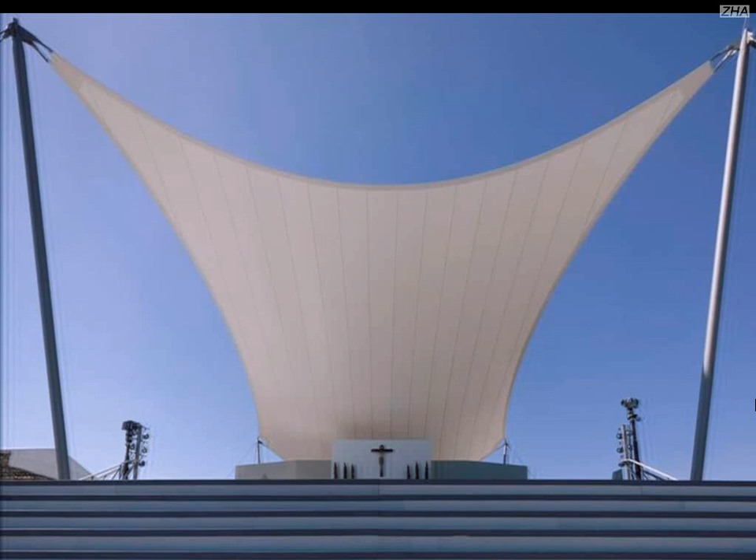So talking with Materialleichtbau, this is what I did, for example, when I act as an architect. This was a call from the Vatican whether I would be willing to design a canopy for the Pope. So I was a little bit shocked because I went out of the Catholic Church already 20 years ago, but they obviously didn't realize that, so I said yes. And I thought I would design a canopy. We finally designed the entire altar, the chair, the cross, whatever you see there.

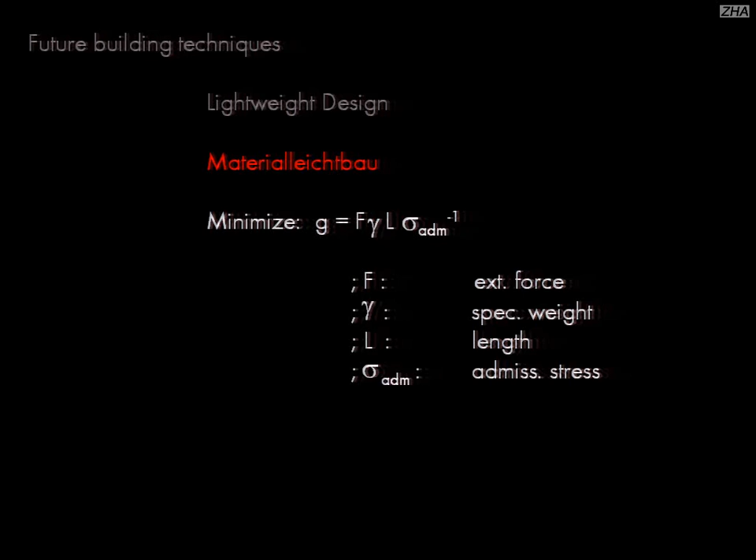And this is Materialleichtbau, for example. This is a material we use, the dead weight of which is in the range of 900 grams per square meter. And now the only formula I will show: if we do Materialleichtbau and ask how much weight does it take to transfer a force from here to here over a distance of 1 meter, this means becoming light. Then we have to fulfill this formula, which is nothing else than minimize the weight g, which is equivalent to the density, the specific weight, divided by an ability, for example, an ultimate stress the material can offer.

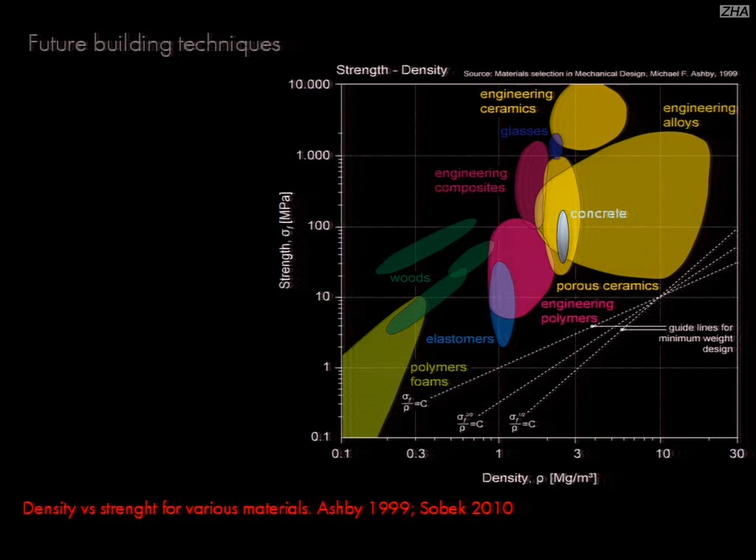And if we now look at famous diagrams like these where you have strength versus density, you find the different material groups, and then you pick 1 or 2 in order to compare them and to find out what material I would have to choose if I have this force in the range of 1 to be transferred over a distance of 1 length unit. And we get a result: for example, steel, you need 30, whatever that is, and concrete 90. So this is what we already knew. Obviously, if we do lightweight structure, we choose steel instead of concrete. And aluminum would be even better, at least if we talk about strength.

And if we would take titanium, it would be even better. In our office, we designed the largest titanium structure ever done with Hans Hollein, 27 kilometers of titanium pipes. But remember this: if we want to become engineers responsible for green issues, architects thinking about green technologies, and we would like to reduce the consumption of resources, we look at this.

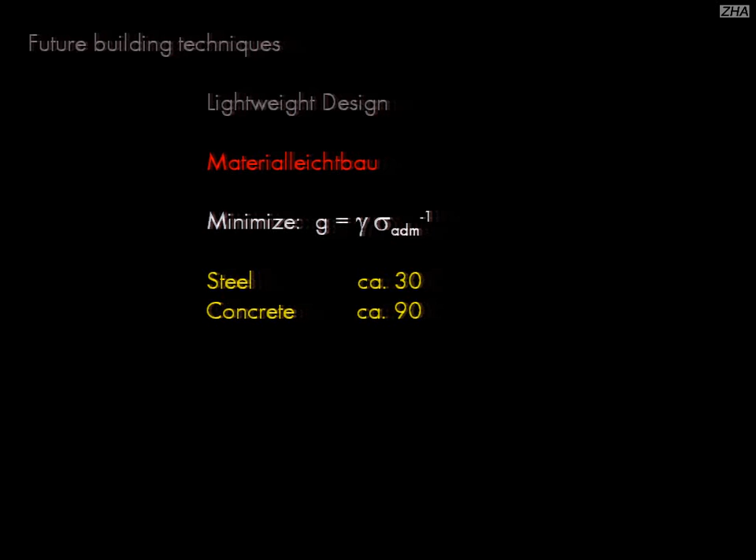But there's another question. In order to produce that material, you need energy. So we call that embodied energy, the energy which is embodied in this piece of glass, which is needed to produce it. And if we now say we don't talk about minimum weight, we talk about minimum embodied energy, the formula is slightly different, but it finally condenses to minimize the embodied energy, which is nothing else than the embodied energy per unit divided by the ability of the material to do something, for example, to carry a stress.

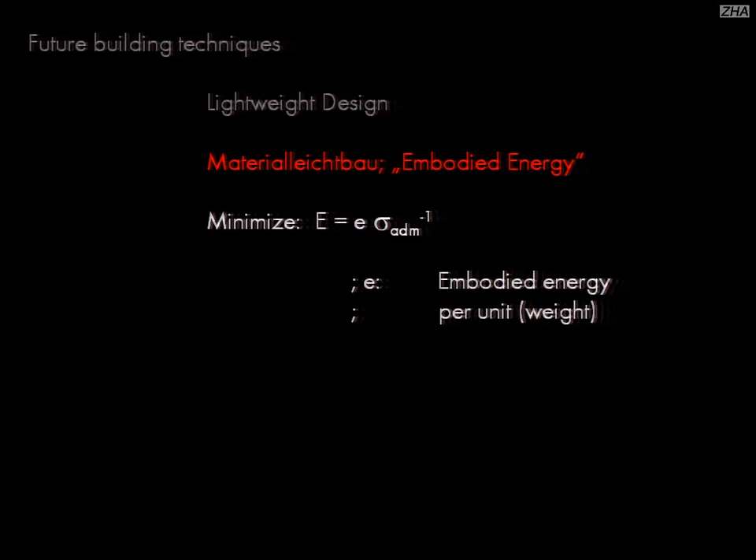So reducing the embodied energy in a building means steel is the hell. You cannot do that. 2 minutes before I said steel is very advantageous. So what are we going to do? Now you might say embodied energy doesn't interest me, doesn't care.

We at our Institute for Lightweight Structures and Conceptual Design did some research, and we found out, for example, that in a typical European residential building, the embodied energy in the building is 30 to 40 times the energy you need to run the building per year.

Means if you do what we actually do in Europe, optimize the life cycle energy by another 5% by increasing the insulation to actually 350 millimeter styrofoam if you go to the passive house technology, this is the wrong head of the hydra we are fighting at. We have to look at the embodied energy. If you reduce the dead weight or the embodied energy by 10%, this is far more efficient than to increase the insulation by another 10 or 20%.

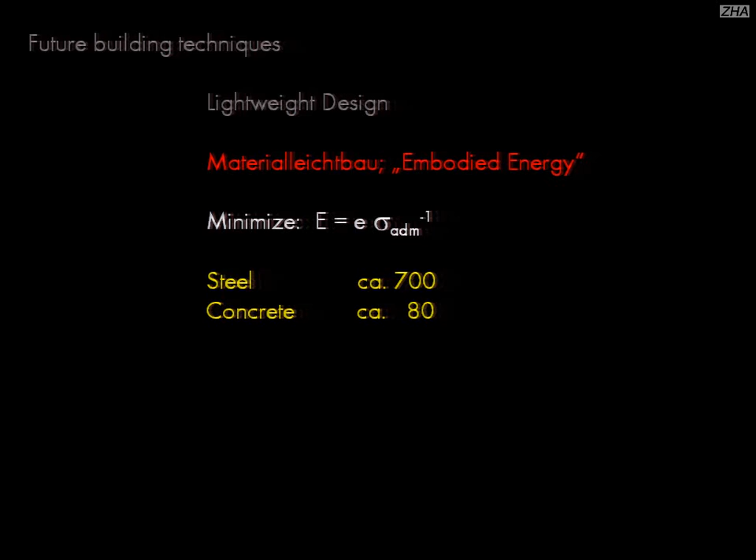So this is something we really have to consider, and as we see here, on the one side, steel is optimal, on the other side, steel is crucial, and concrete is far better. We have a scientific problem, and this is what we are working at. So this is now work we are doing at the Institute.

And we asked ourselves the question, why can't we do that with concrete? We all know gas concrete, foam-type concrete, but there the bubbles have a homogeneous distribution and typically all the same size. We develop now so-called gradient concrete. This is a vertical section through a slab where you see we are still not at the end, but what we can do, we save 30 to 40% material.

We have a very closed formation at the lower as well as on the upper end. And the more you come to the neutral line where there is more or less no force acting, the bubble size increases. So this is very interesting because we reduce the weight and we at the same time reduce the embodied energy.

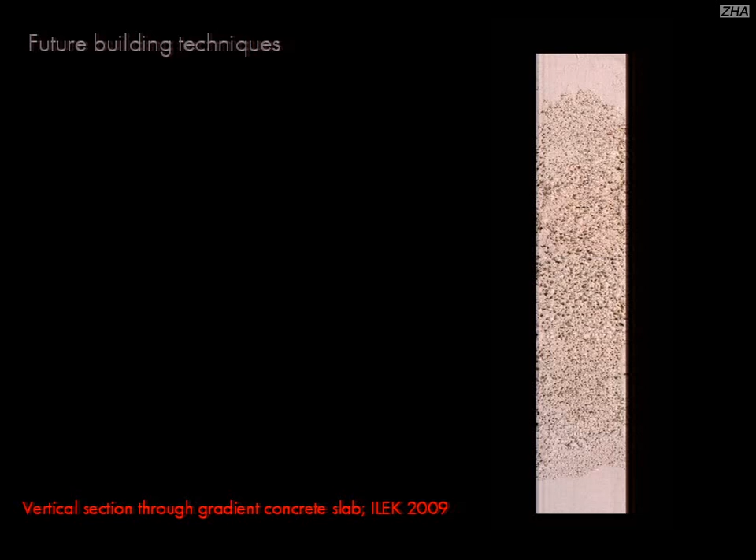If you consider a typical high-rise building made out of concrete with a height of 200 meters, the dead weight of the load-bearing structure is typically 150,000 tons. If you would be able to save 30% of that, this would be 50,000 tons of concrete just for one building. We could take that money and put it into the facade, for example, or in other things which we want to emphasize.

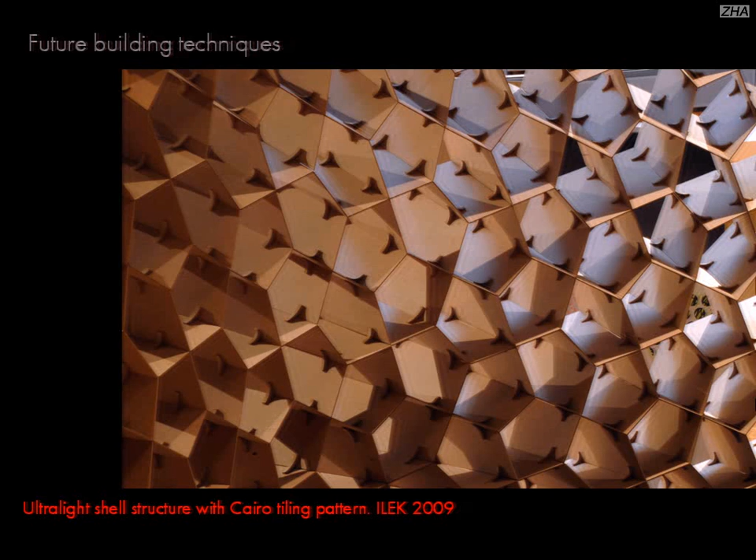Strukturleichtbau. This is creating structures with the minimum weight, structures of least weight. This is something where the scientists started working on already 100 years ago. In the meantime, one came more or less to perfection. This is a sample of a cellular structure we did at the Institute. This is a sponge-type structure we did at the Institute too.

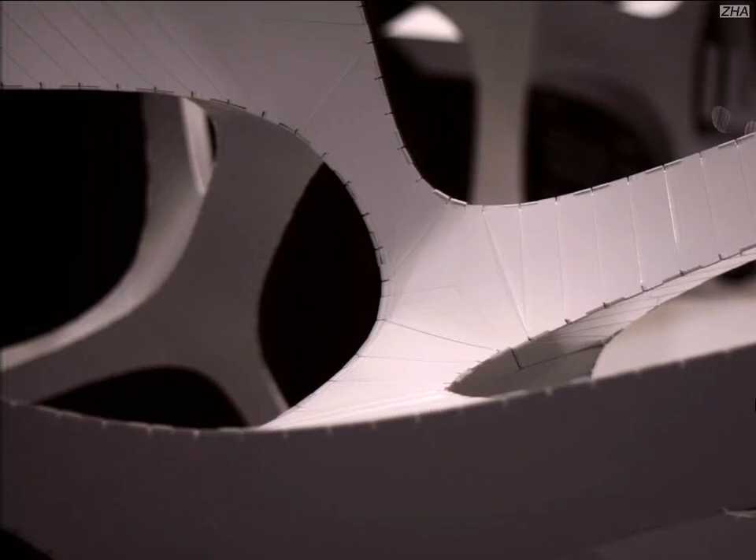This is a student work, for example, which is relatively interesting because the typical problem you face here is that you have, if you look a little bit closer to it, double curved surfaces, which are relatively difficult to be realized with standard materials. I think this is your daily problem.

What we did in this sample is that we condensed them to small parts of surfaces of elements with disappearing, diminishing Gaussian curvature. So we have plane elements which are stuck together and fixed with a rubber band, with a transparent one, which is more or less invisible, wrapped around those elements, and more than 6,500 of those elements form this type of structure.

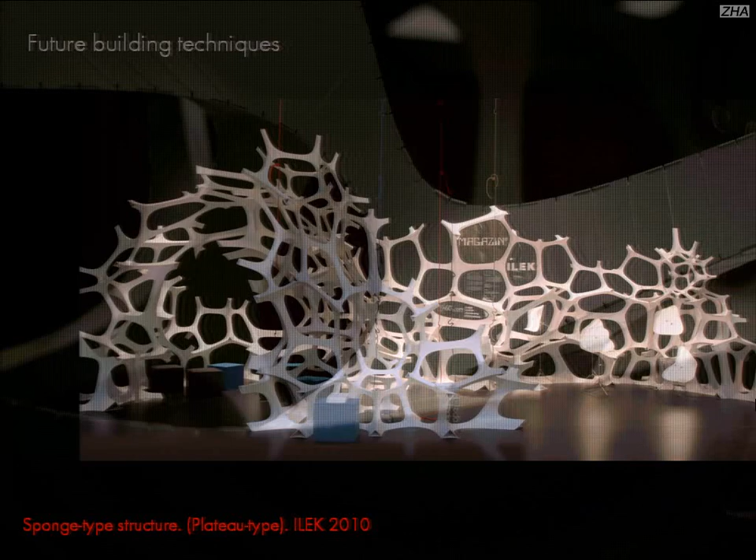That's relatively simple. No sheet of paper. It was designed in the computer. It was directly machined at the institute and put together by a couple of students in 1 or 2 nights.

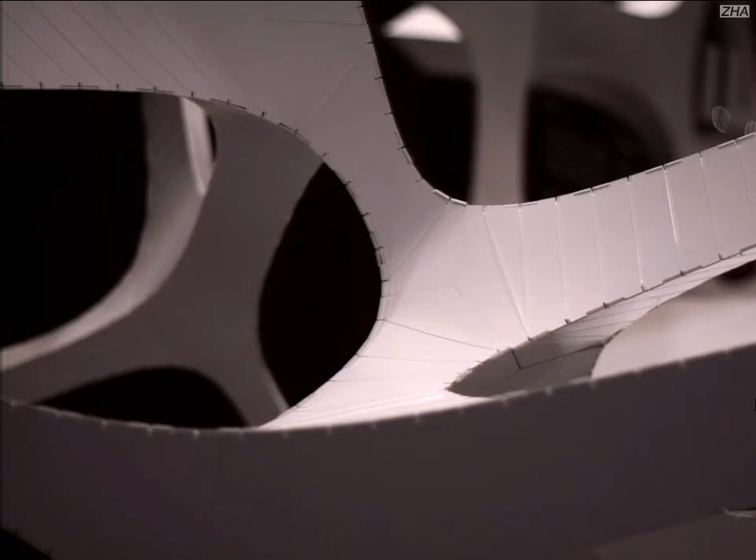Now, if you want to overcome this, this is another research work we did. Double curved curvatures again, at least it looks like that. But if you look a little bit closer onto it, it is a sponge type thing, which we manipulated surface-wise in a way that the Gaussian curvature is equal 0 everywhere. So this is constructed out of a thin sheet metal of 0.2 millimeter thickness with a relatively complicated cutting pattern. But if you do that with a machine, hydrojetting, this is no problem at all.

And then we just bend that into spatial configuration. But there's no double curvature in it. It's totally trivial and simple, and at the end it's relatively cheap. The only thing is you have to connect the elements along the corners, the border lines, in this case with a laser welding technology.

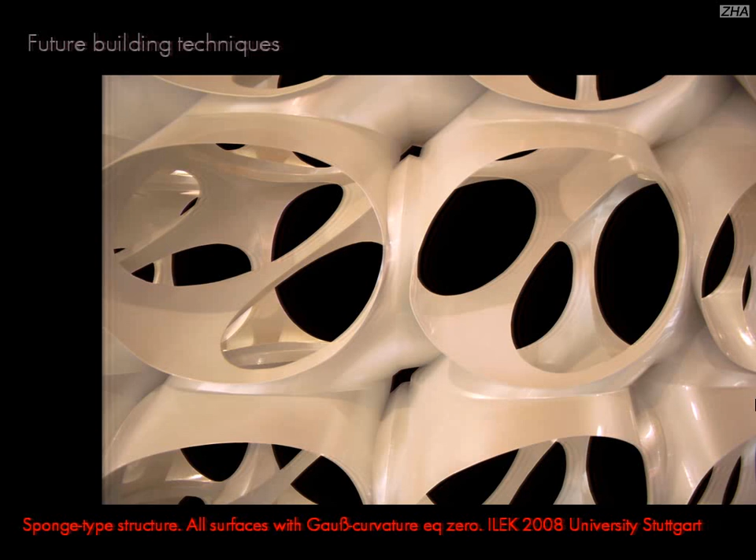So this, the know-how, this is always this ping and pong. The projects we are doing in the office, which are very often relatively complicated geometry-wise, but also construction-wise, and which ask for new solutions, are brought back to the institute where we research with about 26, 28 researchers doing their doctoral thesis, and where we develop, for example, technologies where we condense complicated double curved surfaces into an approximation of that curved surface with Gaussian zero curvature elements.

And this enables us then to do very complicated buildings like this one. This is an excerpt, just a part of a length of 30 to 40 meters of an exhibition stand for Audi. Christoph Ingenhoven was the architect. In total, this shell-type wall you see is 300 meters long. It's undulated in plan, and it's curved in vertical sections, so it's a double curved surface everywhere, totally irregular.

And we said, okay, this is Audi, and on the Frankfurt Motor Show, Audi is directly between Maserati, Ferrari, and Porsche. So we somehow have to capture the clients and keep them in a wall, so that they don't look at those cars. So we built this wall, a transparent wall with a length of 300 meters, 6 meters high. And again, the question was how to do that.

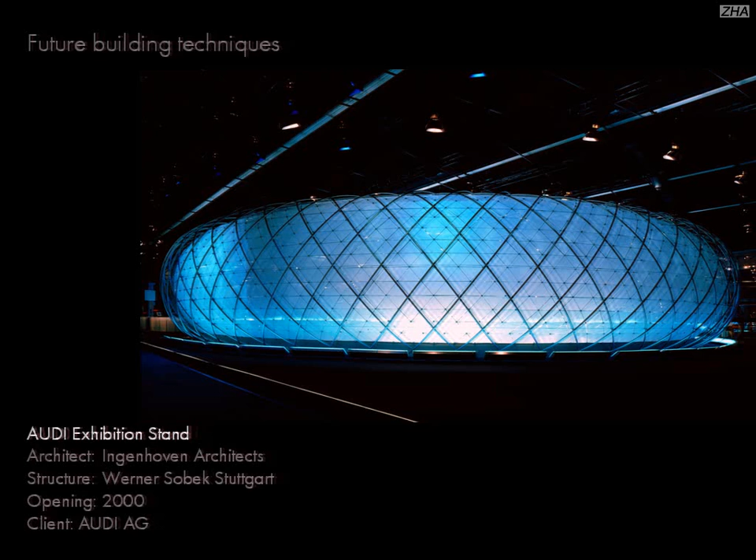And this was all prefabricated, loaded into a jumbo, flown to Tokyo, and installed within 4 days. There was no chance for any repair or rethinking. And if you look at this detail, for example, what you see on the left-hand side, this is 2 of the crossing stainless steel pipes, spatially curved. There's one detail which covers all the thousands of geometrical situations.

And again, we worked on that detail, I would say 5 engineers for 4 weeks, for a 200-gram detail. But at the very end, it was one detail which covered every problem, instead of having 250 different details, which might be manufactured wrong with a mistake, an error, etc. And then, of course, stainless steel, machined automatically and installed, this is important too, by one worker with 2 hands. There was no third hand needed. There's one single bolt which holds everything together.

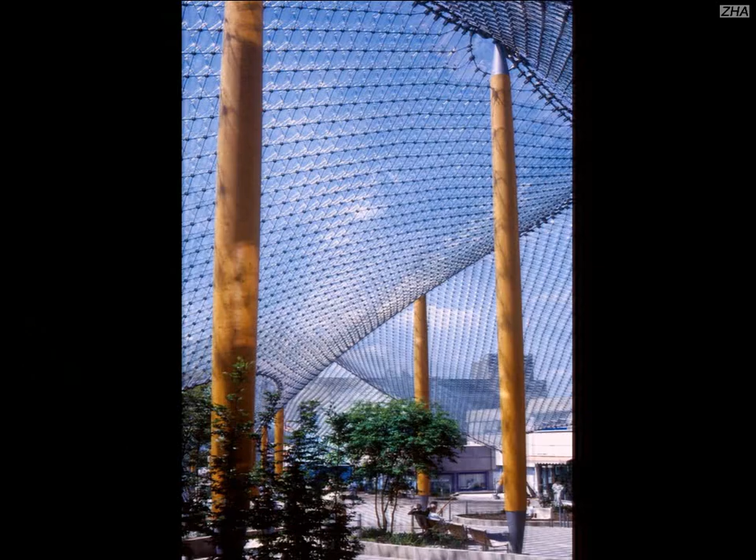So, very comparable to that. This is another, it's a cable net roof, double curved. The first application ever done, we got a patent for that, where we applied glass shingles. So normally, if you have a plane roof, square meshed, it's very easy to be produced, relatively cheap. If you then take the square mesh roof and bring it into spatial configuration, the square-sized meshes become diamond-shaped. In this case, we would have had, I think, 42,000 different diamonds to fill out with glass.

So you could say, okay, if you survive the Audi exhibition stand, then you will survive that too. We said, now we want to introduce another technology. We know how to do it, let's say, in a smaller variety of geometries, but here I said we want to have one glass pane. And if you have one glass pane, then you have to develop a shingle technology where you lift the glass off the cable net plane. This is what we did here.

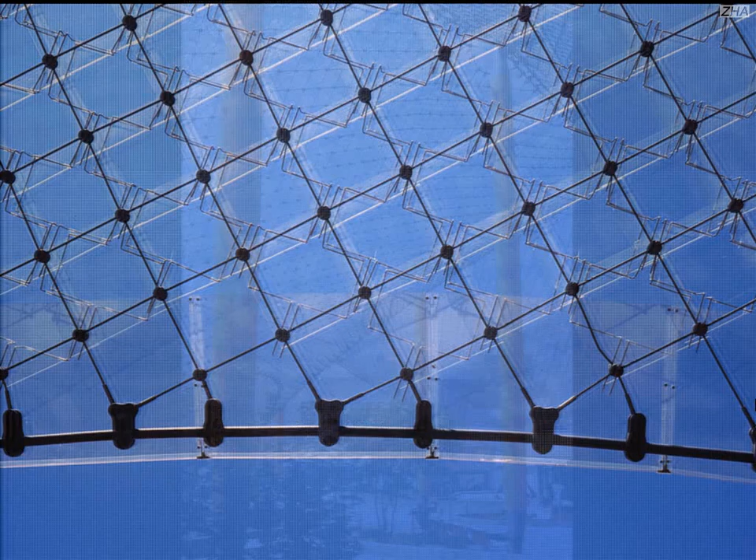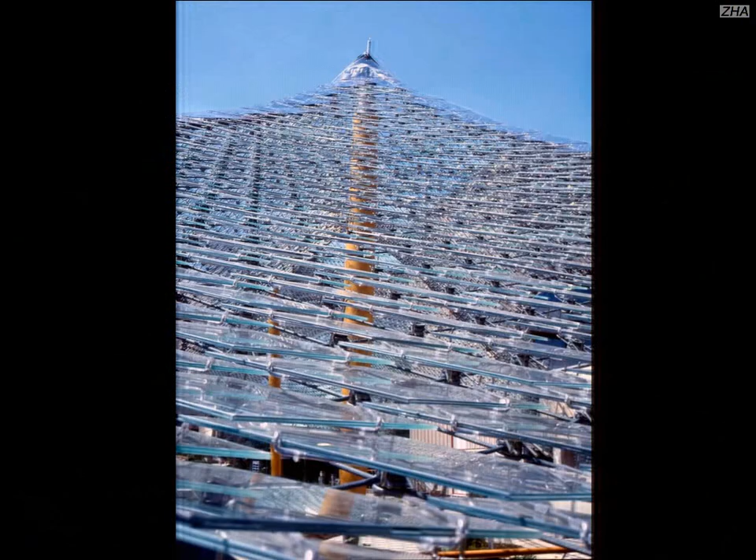So this is square-sized elements held in place with a stainless steel wire. It gives a very nice appearance, like if a spider would have woven a web. And if you look a little bit tangentially into the surface, then you see they're overlapping. So of course we had to do rain tests, wind simulation, etc., in order to guarantee that the wind does not drive the rain under the shingles and make the people wet. But in that case, it works perfectly up to 50 kilometers of wind.

And then we said, okay, since this is an open space, if the wind is beyond 50, nobody will be there. This is in Bad Neustadt. It's in deep Bavaria. You really have to make a decision to drive there. You even lose handy connection on the way.

See, the technology we applied here, in a building with GMP, a huge maritime museum in China close to Shanghai. We again have a cable net. You see the two sails. The top is about 65 to 70 meters high, so it's a huge construction, as you see here. Huge shell-type cantilevers, and the glass skin, which spans between the two shells, is about 60 meters high. And again, it's a cable net, double curved.

The meshes are, of course, diamond-shaped again, and the four nodes of the mesh are not in one plane, so everything is double curved. But here we did a form-finding technology where we guaranteed that the warping of the panes, if we have a plain sheet of glass and fix it at 3 points and then squeeze it onto point number 4, is such that the glass does not break, which then yields to this type.

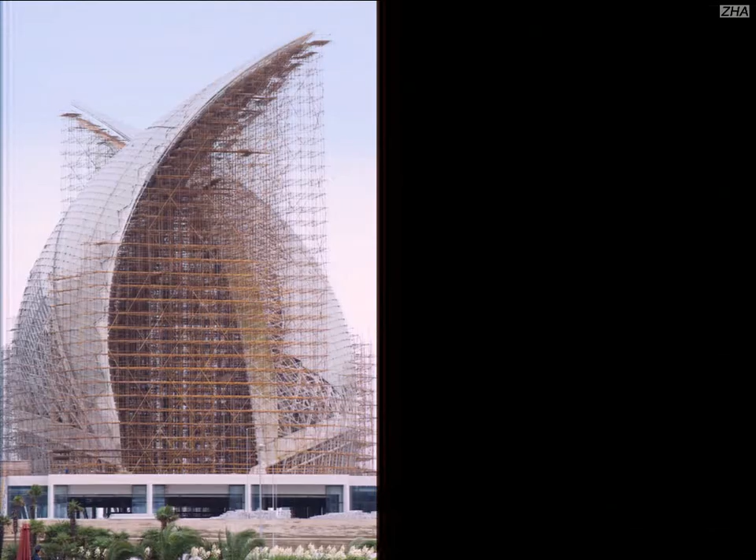Yes, this might move, I would say, up to 200 millimeters, which is no problem at all. 200 millimeters plus minus. You will see an example later on where the facade moves 400 millimeters inside outside. And the forces? The linear forces? They are okay. The cables in that Lingang museum are, I think, 10 or 12 millimeters, which is modest. And the pane size is close to 800 millimeters, which is very economic, very modest.

So this is one of the largest facades ever built. This is 40 meters high and 1,000 meters long. It's a cable supported, minimized material facade for the airport in Bangkok, where we did all the above ground engineering. And the concourses are able to load and unload 64 wide-body aircraft at the same time. And what is interesting, the concourses are covered mostly with textile.

In this very hot, very humid climate in Bangkok, at the same time, the new runway is relatively close. And in Thailand, aircraft are still allowed to land and take off which emit a noise in the range of 110 decibels. Those aircraft are not even allowed to fly over Europe. So we had an acoustic problem and we had a thermal problem.

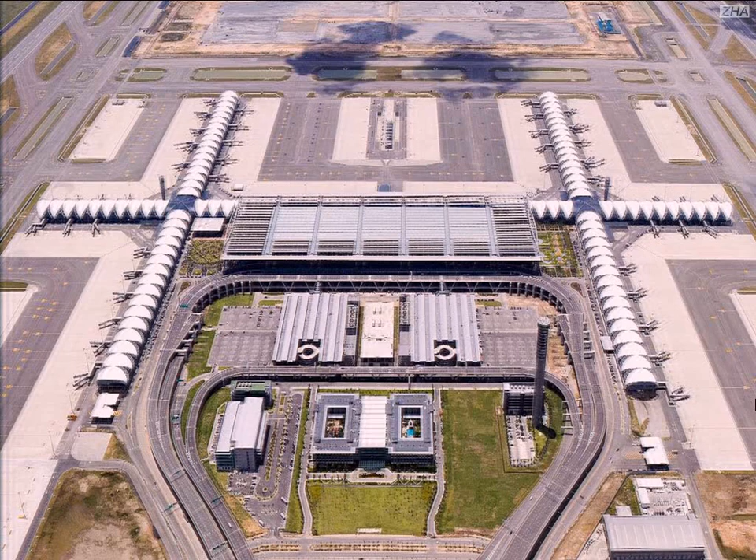And the question is how we solved it. Again, we said we want to minimize the electric energy to light the building. So we want to have as much translucency or transparency as possible, but we have to keep away the heat. The technology applied here took us 2 years of research, privately financed, 4 disciplines: an acoustician, an energy specialist, the facade and structural engineer, plus the architect.

And what we developed is a 3-layer compound of textile. The outer one is a traditional glass fiber, Teflon coated, to keep wind and dust and rain away. Then the intermediate one is a very thin cable net infilled with 5mm polycarbonate, which is totally transparent but has another specific weight. And the lower one, which you see here, the inner layer, is a semi-open weave glass fiber, coated. And the new thing here, this is coated with a low emissivity coating.

Low emissivity, you know that from the flat iron at home. Nobody ever knows whether the flat iron is warm or cold. By approaching your hand, you don't even feel that. So what you do is you make this, or this, then you know. The flat iron is 200 degrees hot, and you are not able to realize that because it does not emit warmth or energy. And we took this effect, which occurs with aluminum, with stainless steel, and a couple of other materials. And we said, if we would be able to transfer this effect from the flat iron's aluminum onto the textile, then this textile could be warm or even hot, but it would not emit warmth.

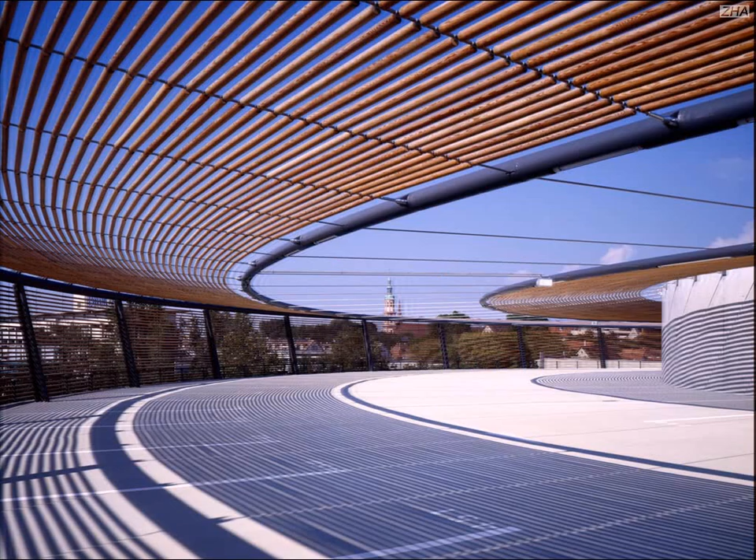This is a very simple, low-budget parking garage where we provided a shading element for the top, which is nothing else than horizontally spanned cables. In order to avoid that they start dancing under wind load and wind turbulences, we introduced this thick pipe, which encloses also the lighting and which is then filled up with concrete in order to provide some dead weight. The rest is relatively simple. And I think quite charming, the result, and very cheap.

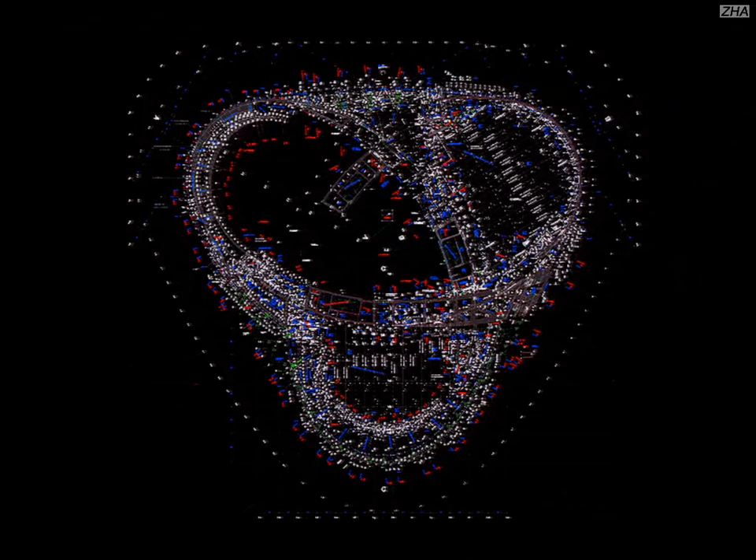And there are more complicated things like this, the Mercedes-Benz Museum in Stuttgart, where we did the entire engineering. I would think one of the more complicated concrete structures ever built. It's more or less all exposed concrete. And we did the entire building in 3D, of course. So this is the typical type of drawing.

There were 1,500 different window sizes. There was not much space for taking up tolerances, etc. So everything had to be very, very precise. Of course, our experiences go up to high rises; actually we are designing one with 380 meters in China. We already designed some which have not been built in Ras Al Khaimah with 850 meters too.

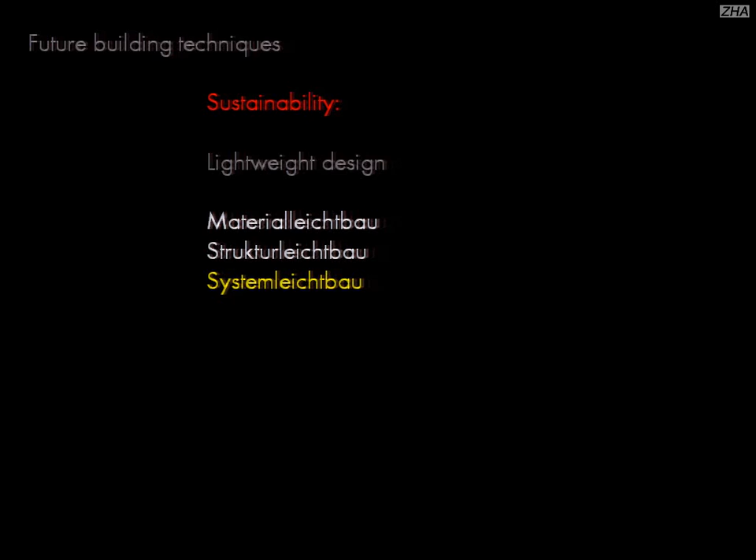And then Systemleichtbau, this is when it all comes together, when we combine the Materialleichtbau, minimizing the embodied energy or the specific weight relative to the ability of something, and introducing lightweight structures principles too. This is the first project I did. When I left university, I fell into that. It was in the southern part of France, in Nîmes, a project which had to fulfill French codes, but the project language was English, with the only problem that I was the only one who spoke English, and all the other ones spoke Italian and Dutch and whatever. So it was a Babylon on site.

But the interesting thing is this is a temporary structure which had been built into the arena for 14 years, always installed in October and taken out before the tourists came in April. It was a temporary roofing over the winter time. It was the largest air-inflated cushion ever built. The clear span of the white cushion is 60 by 90 meters. It's 1 millimeter at the top, 1 millimeter on the bottom, and it's air-filled with a slight overpressure.

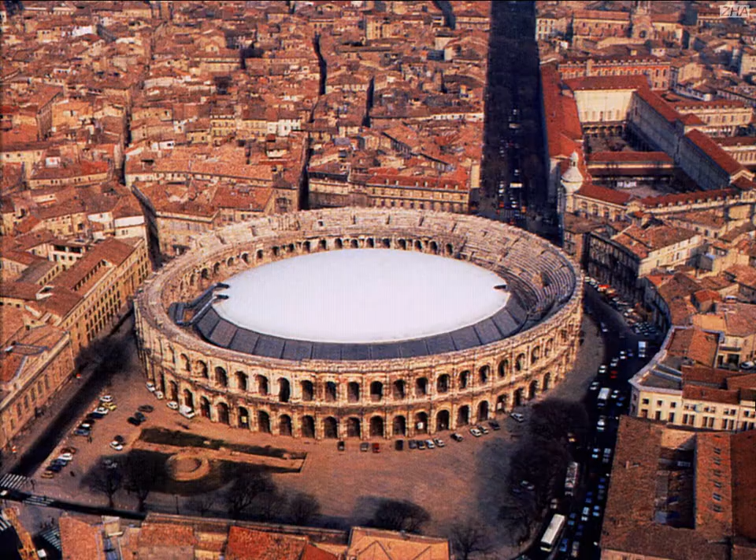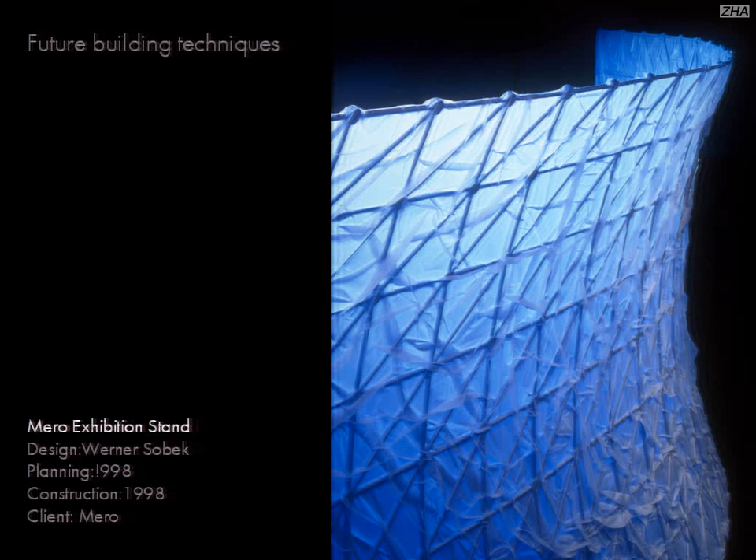And it had to resist more than 200 kilometers per hour of wind speed and very heavy snow loading, which nobody expects in the southern part of France, but which exists. So this is building with air then. You use air as a structural element. And so we said, okay, if we use air in the air-supported structure, we might even become lighter if we avoid the air. But this means working with vacuum. So what you see here is the first vacuum facade ever built, for an exhibition stand. A small piece so that the risk is limited.

We did a design for Mero. They are famous for their space structures. And they asked us whether we could help them to open new markets. And so we developed a shell type Mero thing where you have just a single layer. And they were so happy about that they wanted to have an exhibition stand with that. The only question was, what do we do with this relatively rigid Mero thing? So I said we have to throw a big negligee over it.

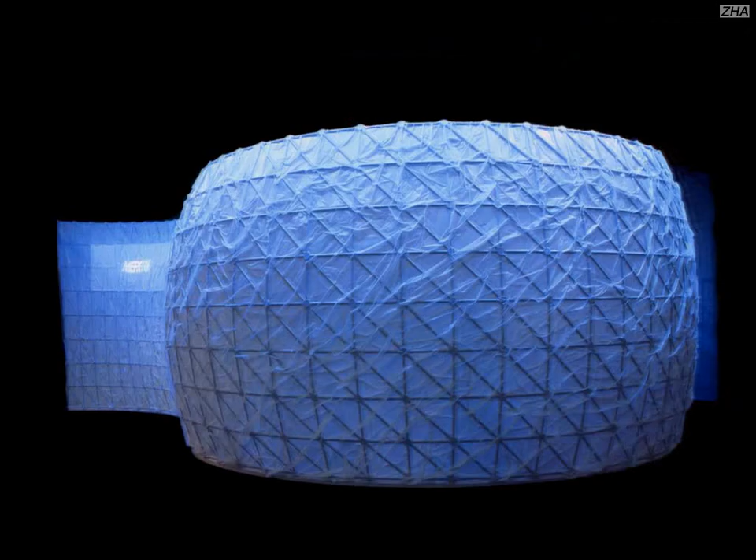What we finally did, we bought a relatively cheap PVC plastic film and we glass powder blasted that. And we fixed it on the lower edge, threw it over the thing, which is in total 5 meters high and more than 30 meters long, and fixed it again at the lower edge too, so that we had a closed volume, and then we sucked out the air. And we oversized the bag, the plastic film, because we wanted to have those wrinkles and folds, which added a lot of aesthetical, tactile qualities to it. People love to touch that.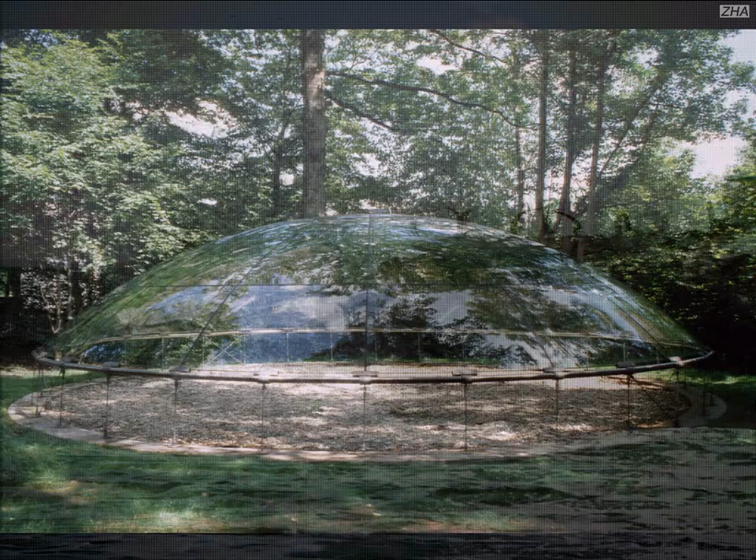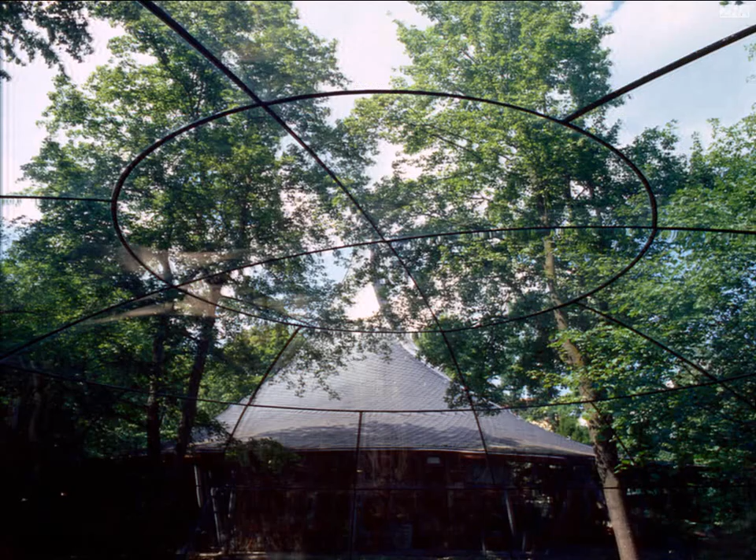This is the first outcome, the first glass shell which is totally glued, no metal connections. In that case, it's 8.50 meters clear span. The thickness is 10 millimeters. So the ratio is 1 to 850, which is far thinner than the ratio you find in an eggshell, and which is close to working with paper. And crawling below it and looking upwards is absolutely fantastic.

So, now facade technology. We did glass and other facades for many buildings. This is one example, more or less totally glazed double facade for the Deutsche Post Tower in Bonn, with a huge series of flaps which can be opened and closed automatically depending on the wind speed and wind direction, so that the wind stream between the outer and the inner layer of the facade is always such that you can open the inner windows and stick your head out without running into the problem that all the paperwork flies away.

This is a facade we did in Washington with load-bearing fins exposed to the outside, glass fins. That's all load-bearing glass there. And this is quite a nice project. I'm a friend with Finn Geipel, who is a German architect working a lot in France for more than 20 years, and Finn and I, we are doing most of his structures or his buildings together.

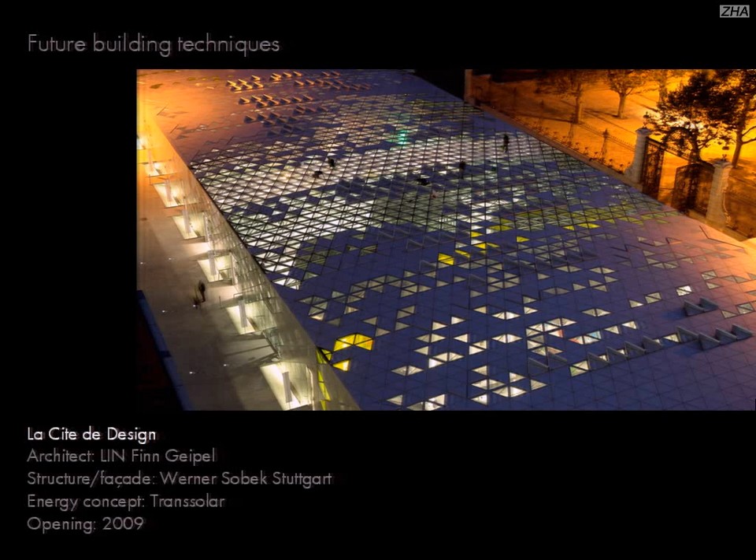This is the newest one, La Cité du Design, in the southern part of France, in Saint-Étienne, which is the first building of a huge area, which is the French center of design. It's typically French. There's always a center, and they call Saint-Étienne the French center of modern design. So they're installing a design school there, a museum, and so on. And this is the first building, which has to fulfill all those functions for a couple of years. So it's a monospace, meaning a one-room building, 200 meters long, 40 meters deep, 8 meters high.

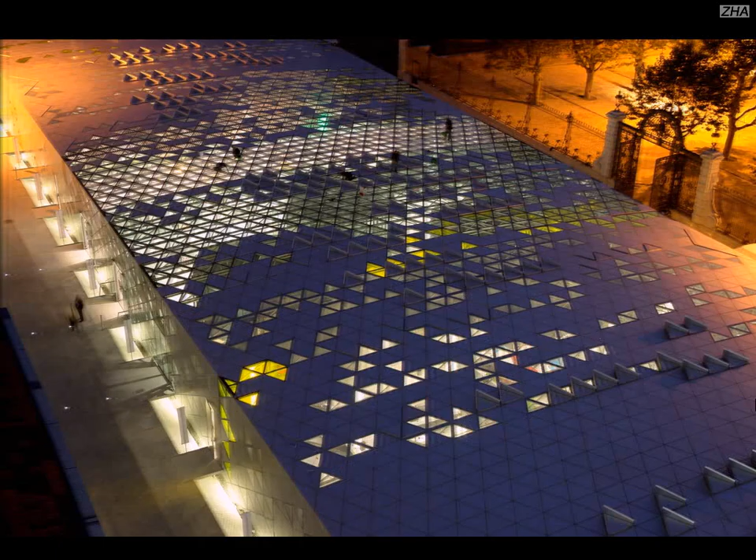And if you look at it, we did it absolutely light. And we created a surface, which is the outer facade as well as the roof, consisting of 14,000 triangles. And they all have different functions. Some of them are just there for insulating and waterproofing. Some of them are there for collecting energy. We do that with photovoltaic, but also photosynthetic. Other ones have switchable glass. Other ones have the so-called zebra pattern, which is insulated glass with a third layer in between. And you have a stripe type painting or printing onto them, and by shifting the intermediate piece, you can shade the elements. Some of them have colored glass and so on. It's very, very nice. So, as I said, some of the triangles are switchable glass.

This is a patent we have where we developed switchable glass which is not based on organic material. There are two types of switchable glasses on the market. The one which is based on organic material cannot resist temperatures higher than 90 degrees. What we measured is if you darken the pane totally and expose it to sunlight relatively long, 3, 4, 5 hours, then you have these 90 degrees. And then you run into the problem of chemical degradation.

The system we are working with is based on non-organic material, which switches in real time and which can provide a shading coefficient in the range of 50%. So you start with a 50% translucency and you can make it totally dark, or you start with 70 and you can reduce it down to 20% transparency. This is something we are working on. We have tested that for 6 or 8 years. It's absolutely robust, and actually we have a huge research contract where we transfer that technology to floor-high panes.

This is another example. For the facades we are doing, this is the first real vacuum facade, outdoor. So this is one of the saddest places in the world. It's the concentration camp Sachsenhausen in Germany, which is a national monument, and which, due to degradation caused by weathering, had to be protected with a building with a clear span in the range of, I think, 40 by 50 meters, column-free.

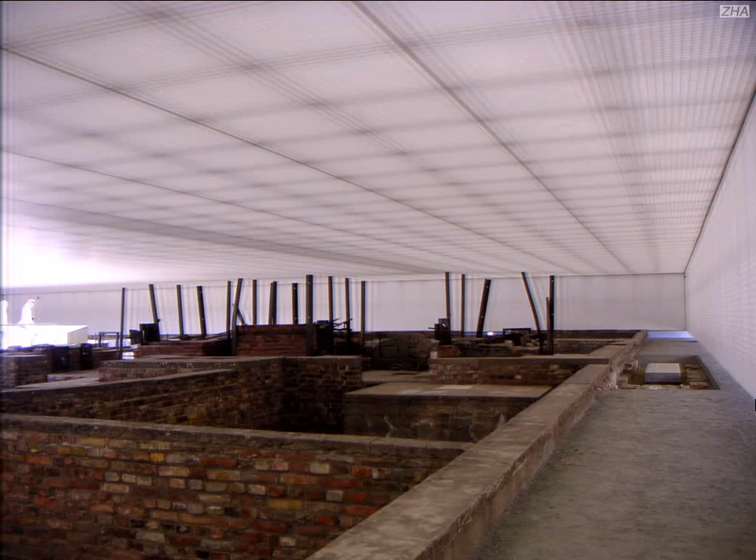And then we fixed at the lower lines huge pieces of fabric, the lower end, and threw them over the structure, again formed this closed bag, and then evacuated the space in between, so that all the facades, the top, the vertical, as well as the ceiling, are sucked onto those gratings. So this gives you the chance to provide more or less detail-free, huge surfaces.

And if you now imagine that this translucent ceiling is held in place by negative pressure, a very slight negative pressure, I think that's quite fantastic. Because if you now transfer this idea to double curved surfaces, you can take the advantage of the textile technique, where double curved surfaces are a self-understanding issue, it's daily work. And if we then fix the stuff, for example, with negative pressure, you can do more or less everything.

And from a recyclability standpoint, which is one of my hobbies too, this becomes very interesting because you can decompose the building by switching off the pressure pump. Just push the button, and then the sail slowly falls down, and you take this one, have material number 1, you take the steel structure, material number 2. We have mono-material, Ein-Werkstoff components.

So of course, we further developed those things, not only plain surfaces, but introducing origami patternings, wrapping them over structures, applying the suction, keeping them in place. And this is something we are working on in textile facades, where we say, okay, we want to take advantage of the breathability, of the deformability of the material.

So what we did here is we introduced pneumatic muscles, a very special type, but imagine you have a plastic pipe which is relatively stiff here and relatively soft here. And then you inflate it with pressure. Then, of course, the soft part elongates and the other one doesn't. So it bends like this. The soft part gets longer, the stiff part doesn't.

So this is what we did here. You have two pairs which are inflated with pressure, and then you increase the internal pressure, and they form this double banana thing. So you can open the slots in real time. One example for several solutions we investigated and researched on in breathable facades. This is what we call meso type of openings. Meso is 1 to 100 millimeters. These ones are about 80 millimeters.

Another research goes to micro type of openings, which is below 1 millimeter. Micro porosities, which are switchable in order to transport humidity or air or things like this. And this makes us keen enough to propose high-rise buildings, of course, with a textile skin. Multi-layer textile skins, etc. Then another thing, green technologies.

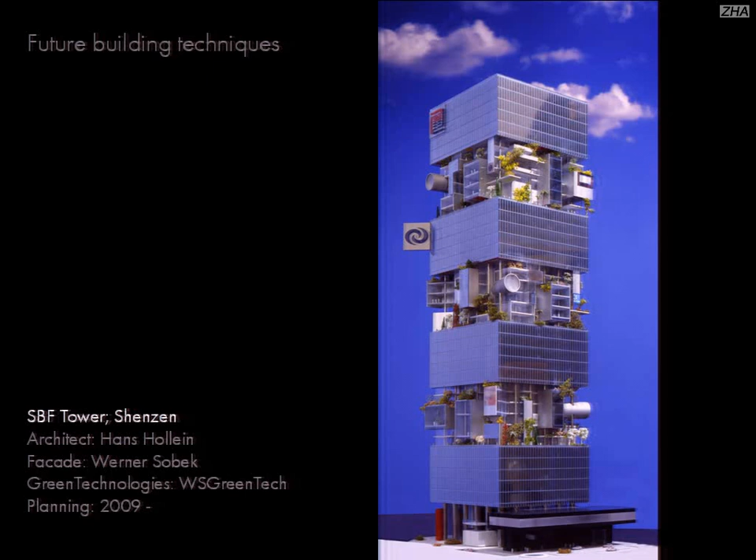But again, we are doing the entire green technology, facade technologies, and so on. There are, let's say, very strict energy saving issues we have to consider there in this very delicate climate of high humidity and so on. So it's complicated. How do we do that? We have a variety of approaches and computer programs.

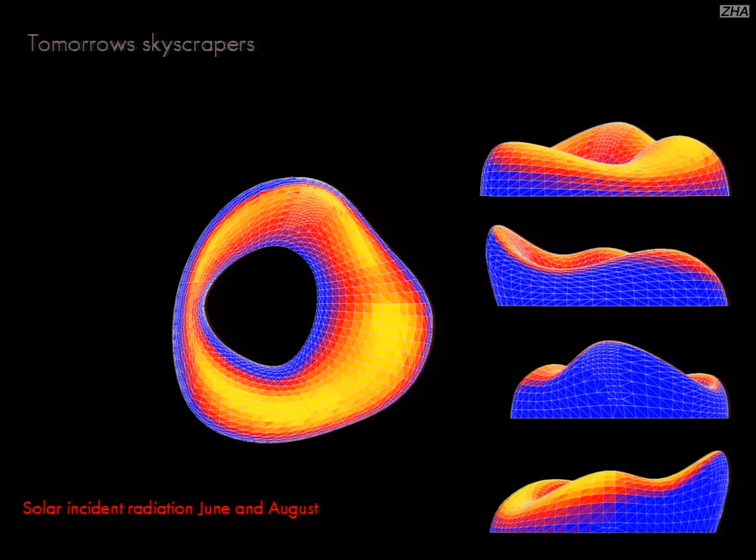Of course, summing up the solar radiation on different surfaces over the year is the most trivial thing. Everybody knows that. This is a little bit more complicated, a little bit more of a unique selling point. So this is now the marketing thing. We are able to design city blocks or certain buildings within a city block in a way that we take advantage from daily or seasonal winds. So we open and close certain parts in plan so that we accelerate or slow down the wind, which means the wind can warm up the surface or can cool down the surfaces, which yields remarkable results.

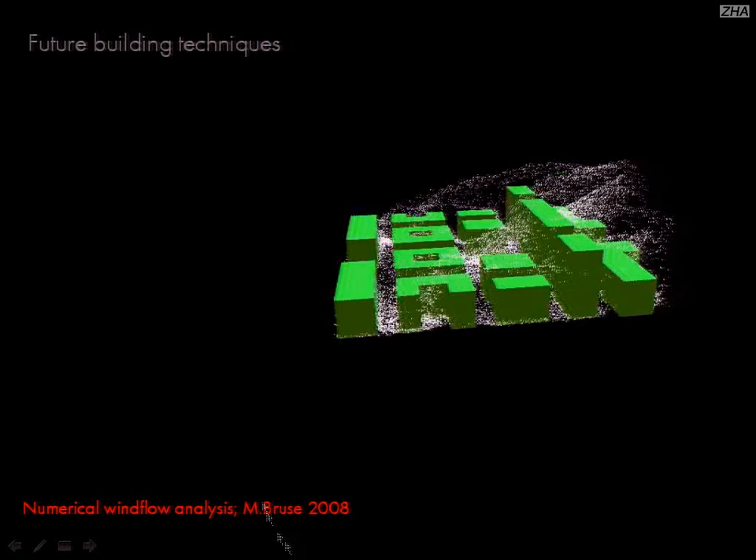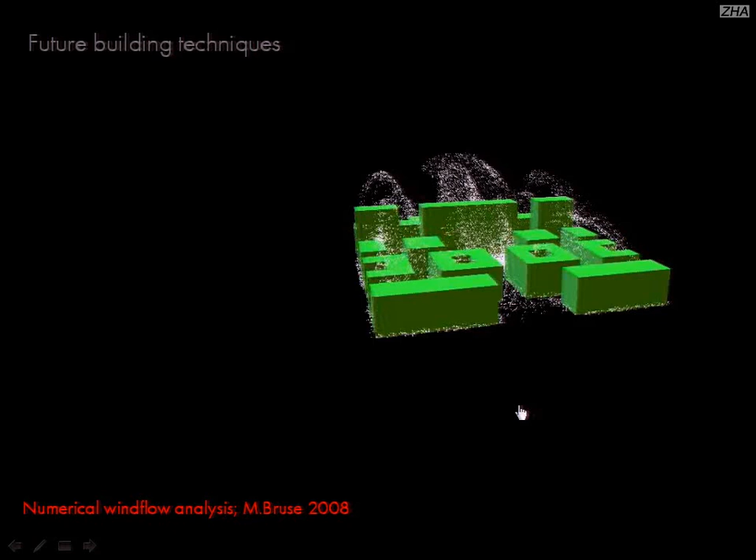But in order to be able to do that, you need a numerical wind flow analysis. So this is now one of our partners, Michael Bruse, probably one of the best in doing those simulations. And this is more than a numerical wind tunnel, because here we do not only simulate the wind flow, meaning speed and density, we also simulate the energy content of the air. So we talk about temperatures and we talk about humidity.

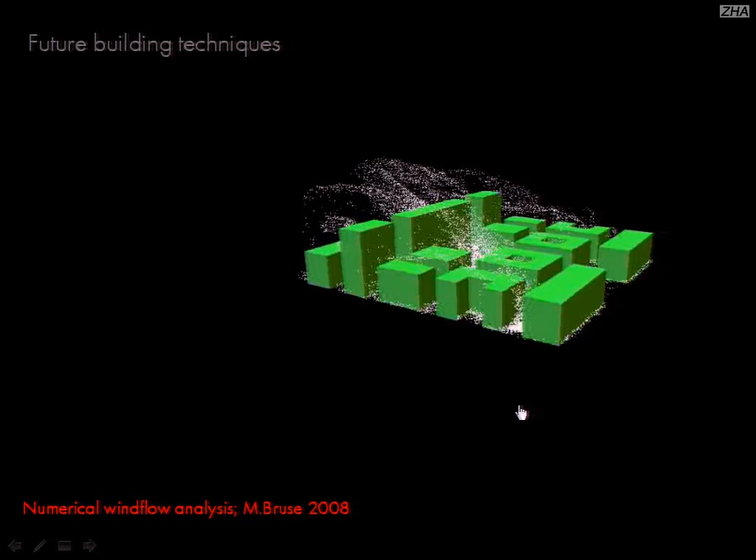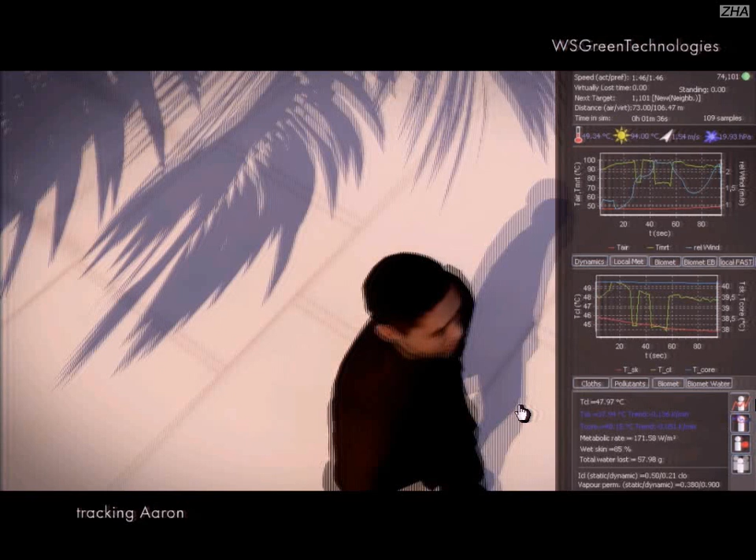And this finally, and this is also a Michael Bruse device, yields computer programs where we are able, plus minus, to predict the comfort feeling of human beings under certain situations. So there are some typical bots, as they are called. This is one walking, I think this is in Abu Dhabi, from the exposed into the shadow. And you see on the right-hand side the transpiration rate of Aaron and the skin surface temperature and the heartbeat frequency and whatever. So the longer Aaron walks in the sunlight, the warmer it gets, the more uncomfortable he feels, or she.

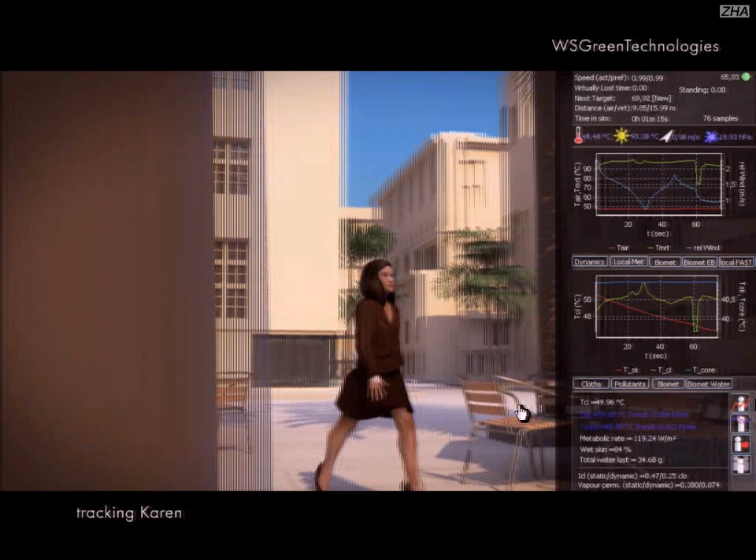And this, at the very end, gives you a clear indication on what you have to do with air temperature, radiation, shading, and things like this. So it does not make any sense to cover entire Dubai in order to provide a comfortable feeling to the people. But the question is, how much of the streets should you shade? What should be the radiation temperature? Can you, for example, install here surfaces which radiate less temperature? If you make them all black, then you have hell.

If you make them white, or if they store the energy until nighttime and release it then by using phase change materials, etc., then you can provide a much better comfort situation in between the buildings. So this is not only indoor, this is an outdoor application of what we are doing here.

And then of course here, the German car industry by law has to guarantee a recycling ratio higher than 85%. If you would ask a contractor on the other side of the street what his recycling ratio is, I think he would get a nervous breakdown. And you could close up the entire German building industry if you would ask even for 20%. Because there is not even an understanding of the term. There is no planning technology to design buildings in a way that you can take advantage from recycling certain materials at the end of lifetime.

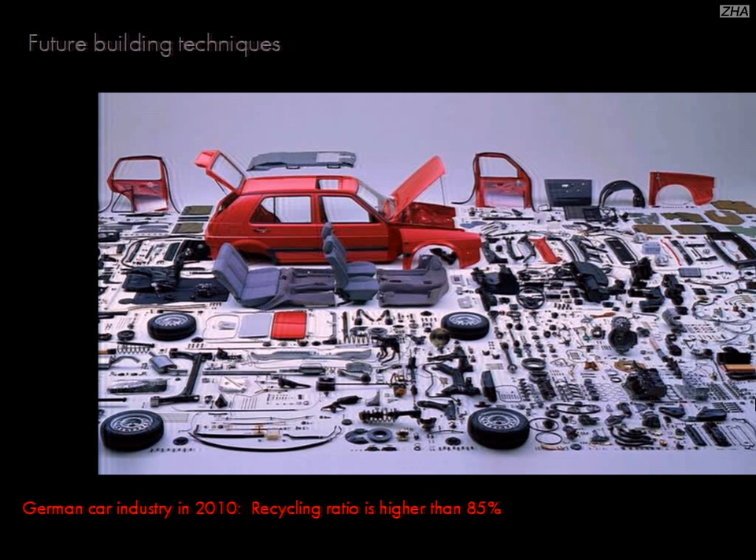If you look at a typical Central European building, easily you find between 15 and 25 different materials glued and stuck and plastered together. There is nobody in the world who will split them up into their initial components. So this is all special waste. And the more passive houses we are doing in Central Europe, the more styrofoam we are adding, the more toxic waste we are creating.

What we evaluated at the Institute, very interesting research work: we asked the question, how much energy does it take to produce styrofoam? And how much energy do you save in a 50-year lifetime period in a residential building with the styrofoam you put on the facade? And there's a very clear indication that beyond 15 centimeters, it's all nonsense. It's all nonsense, because it takes more energy to produce it than you save with it. 15 centimeters. Actual passive house technology is close to 300 millimeters.

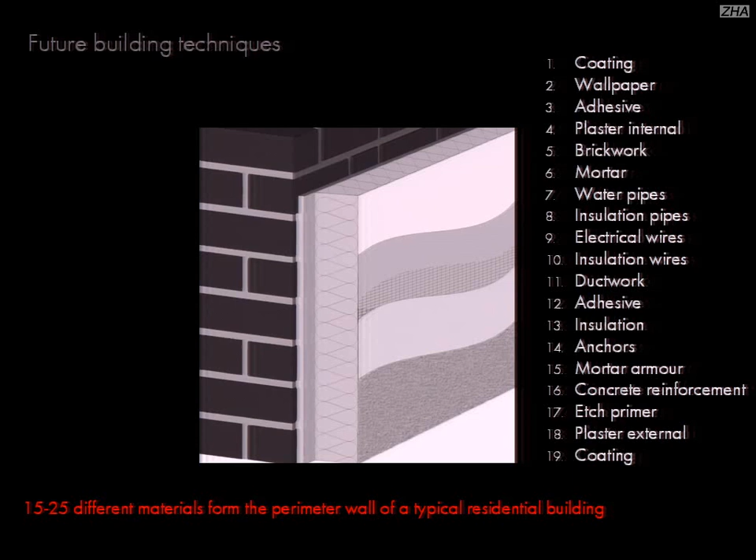So of course, we contributed very much in the Deutsche Gesellschaft für nachhaltiges Bauen. I'm one of the co-founders of this, which is nothing else than a big pot where we collect all the know-how on how to design buildings in a way that will reduce energy consumption, resource consumption, waste production.

Product design, just one thing. We are working with the world market leader in cable cars, which is Doppelmayr. It's obvious, huh? What they need is very light cars so that they minimize the weight to be transported. People are getting permanently heavier, so they have to reduce the weight of their cars. So they need us. This is Systemleichtbau. Multifunctional.

And with the general planning aspect, I already mentioned that. This especially comes from our Moscow, Cairo, and Dubai offices, where we have architectural as well as engineering licenses, but do not work as architects. So especially smaller practices asked us whether we could provide them those licenses and act as general planners with them, and this is a very fruitful cooperation.

So thank you so much. Thanks. Of course. I'm not allowed to answer how much those residential buildings cost, but I answer every other question. Yes.

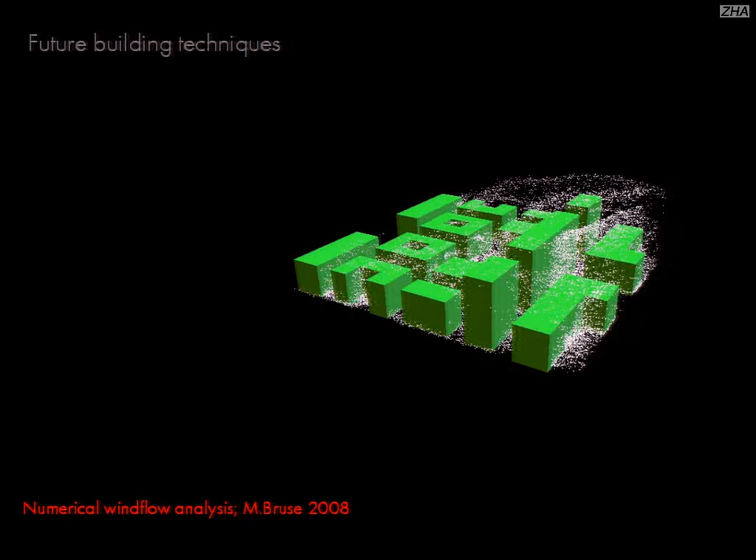Airflow studies. Looking for environmental parameters to work with, because sun shading, some radiation maps, using that was quite easy. The next thing, which also could have real impact on urban morphology, is this airflow thing, perhaps to let some of that air flow through a building, courtyards. But it seems much more difficult, obviously, to get the right intuition and the handle on simulating that.

Yeah. So one route, you're working with the University of Vienna and trying to build a kind of expertise study of the different vernaculars of this world, where you have architectural structures, morphologies, responding to climatic conditions and creating degrees of comfort without those. So it's quite interesting. One that we could elaborate on, select particular projects where we can work with your expertise on generating architectures to take advantage of winds. Yeah, that would be wonderful. Yeah.

It is not as simple as it sounds. Yeah. Just wanting to raise it, if we would like to do this, it definitely helps to do that with a greater asset. So the people around Michael Bruse or in our green technology department, I think they could assist and they could help. For instance, on a competition. Maybe a relatively small building, where you might have a study where winds are channeled over. Exactly how we can manipulate them. Yeah.

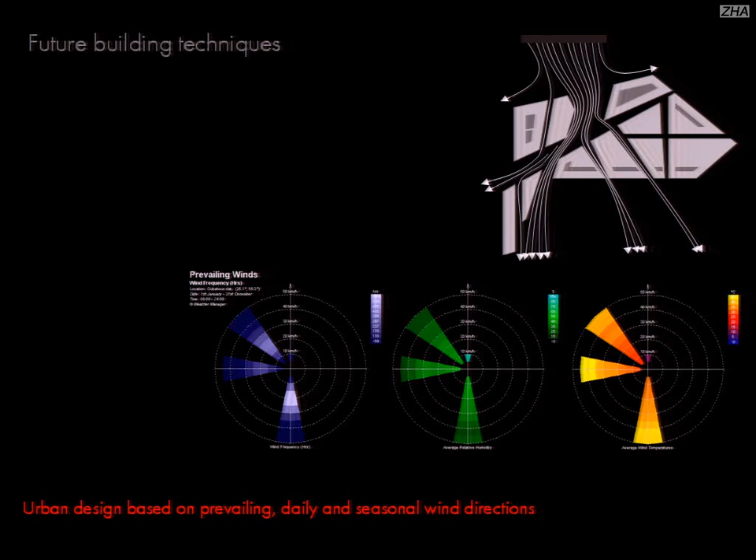Let's do one. I have a problem with that. Yeah, great. Yeah, thanks again. Yeah, thank you.